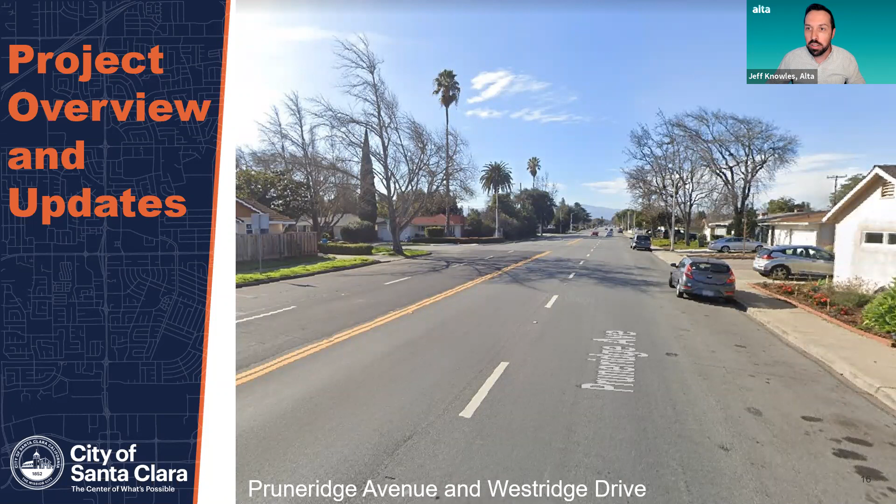I want to provide a quick project overview and updates since our last round of public engagement. Folks have asked, why study Pruneridge Avenue? What's this project all about?

Improvements for Pruneridge Avenue were included as recommendations in the city's general plan. It's also a high priority corridor in both the city and county's bicycle plans. Changes to Pruneridge Avenue help implement the city's complete streets policy, which is 18-8593, if you're interested in looking that up. The city has adopted a policy to try to improve streets in the city to accommodate as many different user groups as possible, whether you're driving, taking transit, walking, using a stroller, a wheelchair, or bicycling.

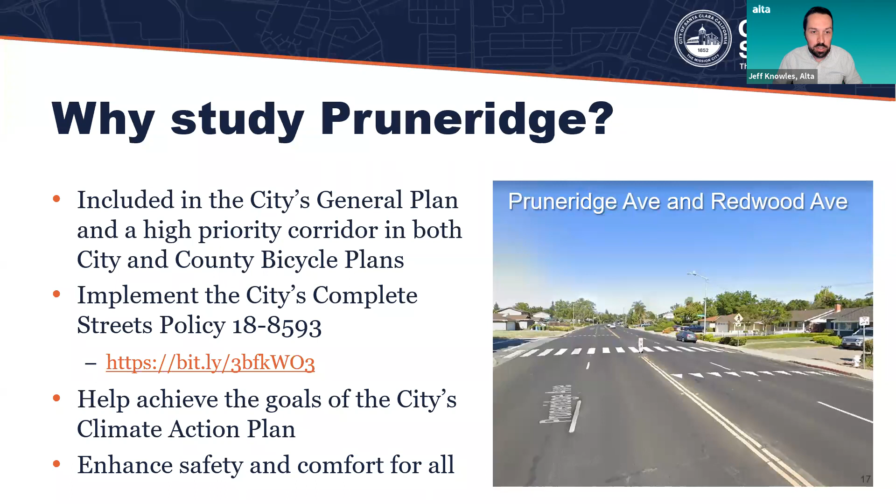It helps achieve the goals of the city's climate action plan by increasing the ability for more people to walk or bicycle for transportation and reduce greenhouse gas emissions the city produces through transportation. It's also an opportunity to enhance safety and comfort for all roadway users, whether it's residents getting in and out of driveways, people that bicycle today, or people that would like to bicycle but don't feel comfortable sharing the road with vehicles, along with residents or people in the neighborhood trying to cross Pruneridge Avenue.

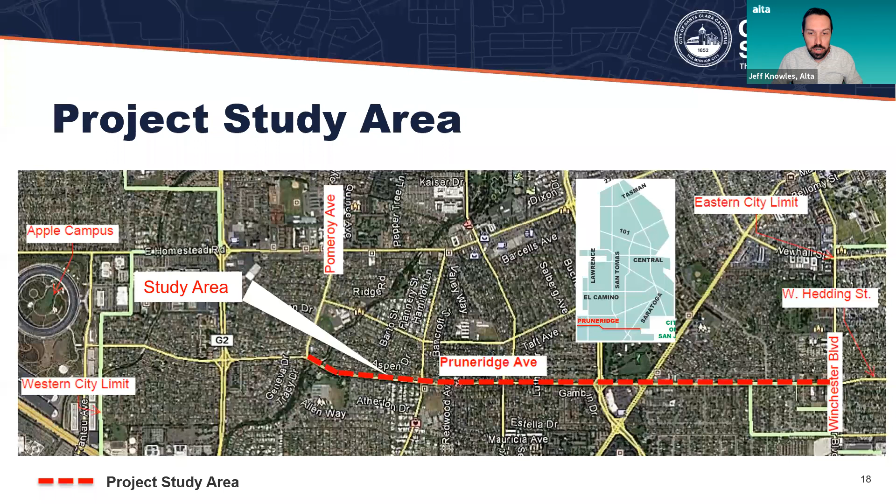This study is looking particularly at a 3-mile section of Pruneridge that goes from Winchester Boulevard, which is your city boundary with San Jose, all the way across to Pomeroy Avenue, just shy of your border with Cupertino and Apple Campus. Pruneridge, as you know, is a minor arterial with a posted speed limit of 35 miles per hour. The city obtained a grant from Caltrans to study this section to better understand the potential benefits and any trade-offs involved with creating a complete street on Pruneridge that better serves people who want to walk and bike more often.

In our last round of community workshops, we asked folks what the priorities should be on Pruneridge, ranked from most important to least important. The number one thing we heard is calming or slowing down traffic speeds on Pruneridge. It's posted 35 miles per hour, but we heard a lot of anecdotal stories about vehicles going much faster than that. People want to see a reduction in traffic congestion, improved bicycle options, walking conditions, and preservation of on-street parking. Those are the top 5.

The top 5 themes that came out of this exercise were that people wanted to see more bike lanes and bike safety. A lot of people wanted to leave the road as is. There was interest in traffic calming, overall safety and pedestrian issues, and preserving the residential character at our first workshop. Then we had a Saturday workshop just like today, back in February, where traffic calming, parking, and bike lane safety came up as the top 3 themes.

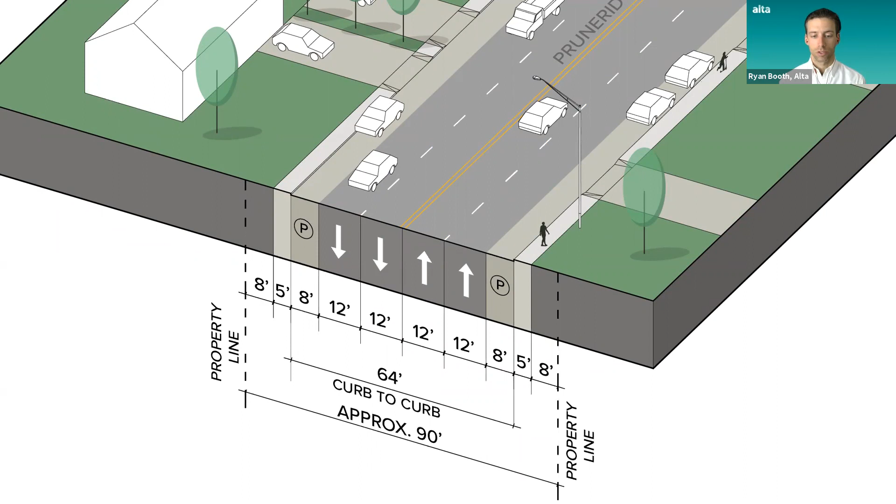Right now, all the intersections and corners have sweeping, long crossing distances for sidewalk users. The size of the corners is directly linked to the speed at which vehicles feel comfortable handling those turns. So in general, wider corners and sweeping turns enable faster speeds. The intersection and corner design on Pruneridge right now is based on old design standards and would not be compatible with today's standards.

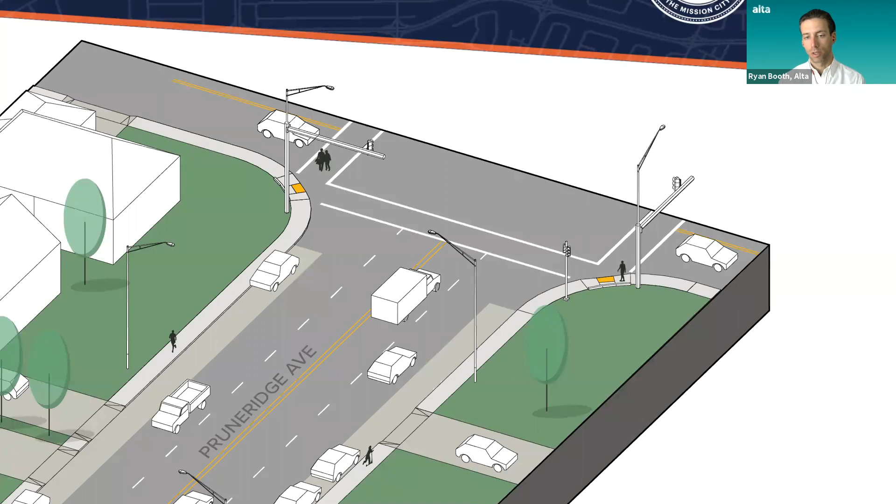Another important thing to point out, outside of the roadway, are the canopy trees that line Pruneridge Ave. They're intermittent mature trees spread along the corridor that provide shade where present. However, most trees are on private property, set pretty far back from the roadway, and don't provide much shade or enclosure that results in pedestrian comfort and enhanced residential character.

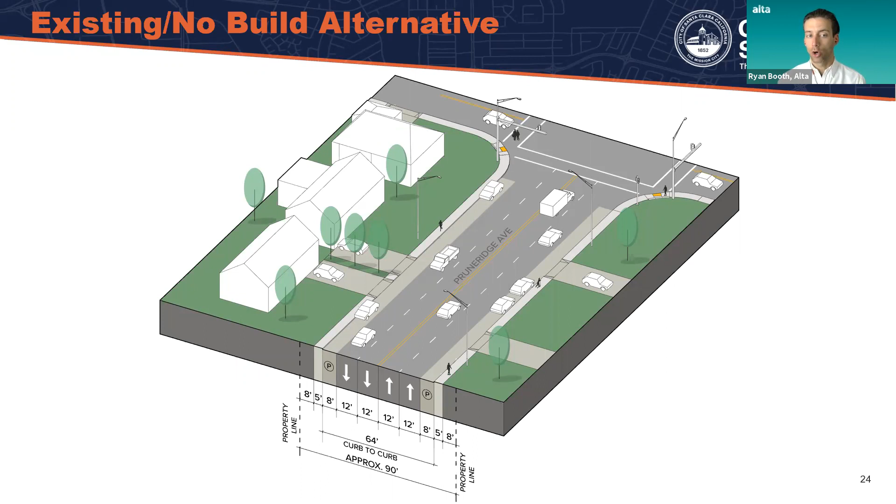So again, this is an example of what Pruneridge is today, the existing conditions. It also represents the no-build option we're presenting here today. Next slide, please.

Diving into some proposed changes: one is to maintain 4 travel lanes. Like Jeff said, to accomplish the goals set out by the city's Bicycle Master Plan, we're putting in what's called a buffered bike lane — a bike lane with an extra bit of buffer to separate cyclists from traffic, as you can see here. Just to reiterate, this illustration isn't of any one specific intersection, but represents what's possible along Pruneridge.

As I said, 4 lanes of travel, narrower lanes to fit the 4 vehicular lanes, but also to promote traffic calming or reduce how fast people feel they can go along the corridor. Moving towards the intersection, you'll see curb extensions and high visibility crosswalks.

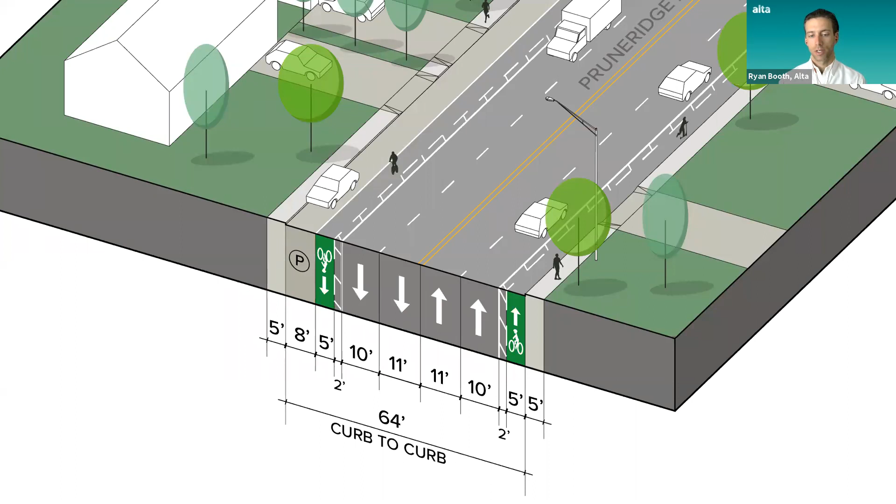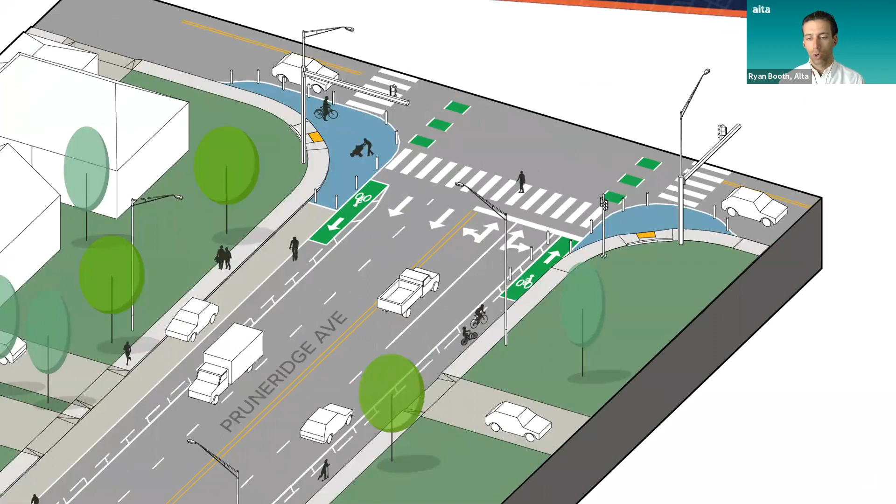What we've shown here is what we call a quick build option — paint, symbols, markings, and some vertical bollards. These are quick build, low cost compared to heavier interventions like concrete and moving curbs. One advantage of the quick build is you can have big impacts on improving safety along the corridor in a relatively quick fashion. It also allows the community to test out design options, see what works and what doesn't, and in the future, if there's a desire to make these permanent, the city can pursue funding and make permanent changes. But these painted options are great ways to introduce the community to these improvements.

And what you see here are high visibility crosswalks, curb bulb outs in blue there, representing areas to shorten the actual length pedestrians need to cross the street, and also promote those lower turn speeds and reduce the kind of cross-cut turns that vehicles are able to make today.

What you'll also notice is as the cyclist approaches the intersection with that green-backed bike symbol there, they get a little protection from a right turning vehicle, and it increases the visibility of the cyclist. So a benefit for everyone that's on the roadway there.

And lastly, I'll point out the light green trees. What we're showing here is the possibility that trees can be added along the corridor to fill in some of the gaps. These trees that we're showing here today are within the public right of way, but because of the constrained curb to curb width that we're dealing with, would be on the outside of the sidewalk. Again, outside of the sidewalk, there's a little bit of public right of way. That's where we're proposing these trees to be added.

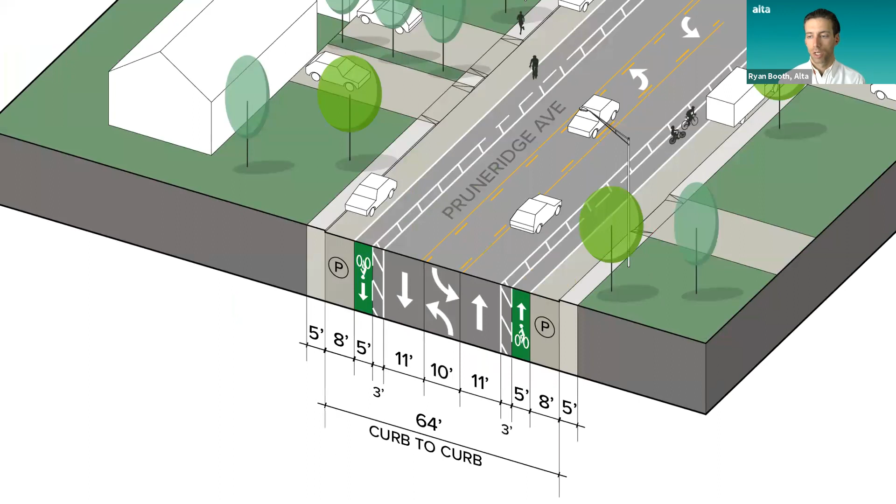All right, so for concept 2, a lot of the same things from the first concept. What you'll see, I'll point out some of the differences here. What we're showing here are 2 vehicle lanes, one in each direction, with a center turning lane. Again, enhancing the traffic calming with some narrower lanes, placing a buffered bike lane on either side.

And then by going with the 2 vehicle lanes with a turning lane, we're able to keep and maintain that parking on either side of the street, just as it is today.

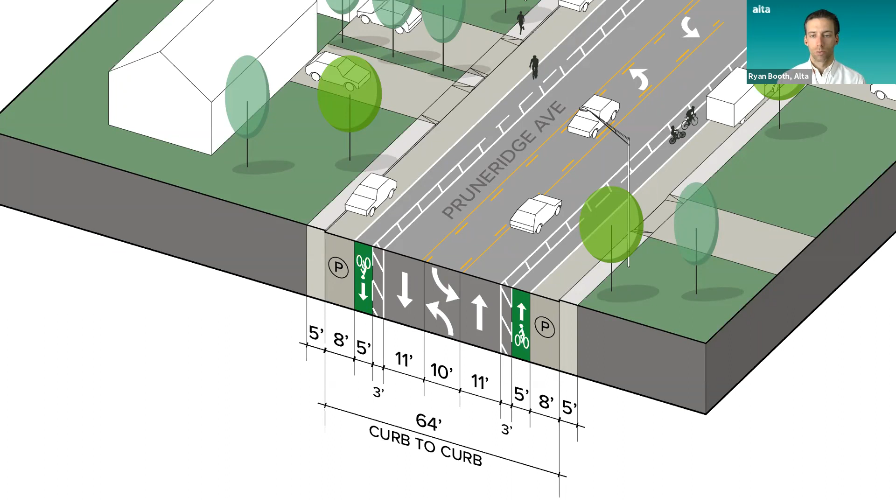Same thing at the intersections with the curb extensions and the bollards, a little bit different configuration because there's a little bit more room, but again, enhanced pedestrian safety with shorter crossing distances and higher visibility. Another thing you'll notice here is that that center turn lane becomes a dedicated turn lane at the intersections. The idea there is to keep the ease of traffic moving at the intersections with the dedicated turn lane.

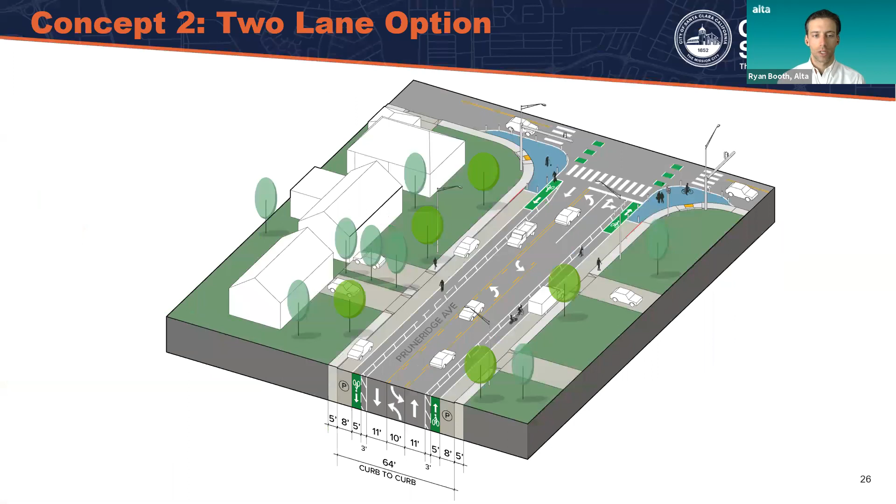All right, one more concept to go through here. Again, I'm going through this kind of fast. We're going to recap all of this and you'll have some opportunity to give some feedback in a moment.

All right, so concept 3, parking protection option. Again, very similar to the previous option with a center turn lane and 2 vehicle lanes, one in either direction. This option introduces the buffered bike lane on the curbside with the parking in the middle.

And so that configuration, what that does is that it separates the cyclist even more from traffic and allows that parking space to act as a protected buffer between moving vehicles and cyclists, and also provides a separation and added comfort for pedestrians along the sidewalk. What you have today, as you see here, is about a 5-foot sidewalk, and adding separation really enhances and makes it more comfortable and convenient for the pedestrian.

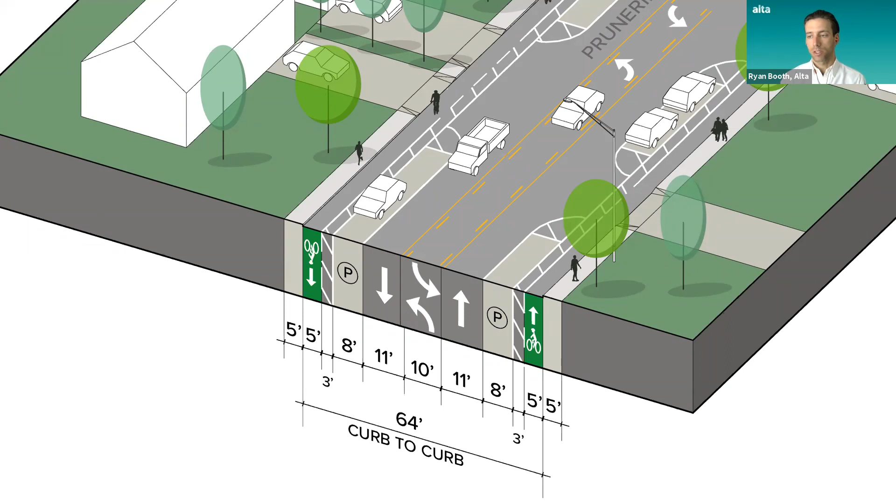One consideration that we'll have to think about here is sight distances as people pull out of the driveways. It's a big concern we've heard from the past public meetings. And so we've introduced some buffer space to pull any parked vehicles away from the driveways to allow people entering and exiting more view shed. So as you're pulling out, you get a longer view down the corridor. You can see cyclists, you can see oncoming traffic, and allows you to gauge those distances a little bit better.

At the corners, again, very similar to the previous one, the configuration with the bike lane and the corners is a little bit different. You've got the bike lane going through, again, protected from those right turning vehicles, added visibility, but yields to pedestrians crossing in those areas.

One consideration for any of these options with the bike lane will be how to coordinate other kind of public services like trash pickup and delivery. These things are, and things like maybe future transit lines, things like that. All of these are compatible with those uses and have been figured out and implemented in many situations. So many times it's about coordinating those design pieces into the design.

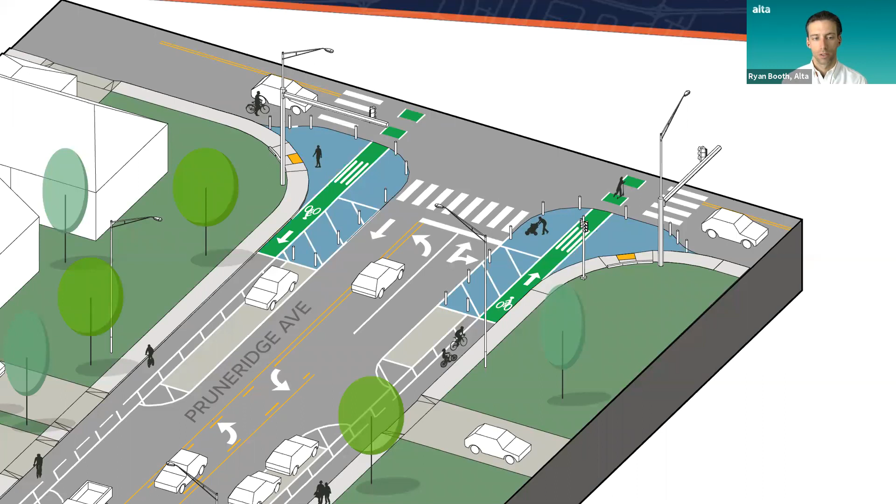All of these design options are currently on the project website with accompanying text and a survey that allows you to let us know your feedback. Let us know what works for you, what doesn't work for you, and we're going to jump into some polling right now. So get ready with your poll EV.

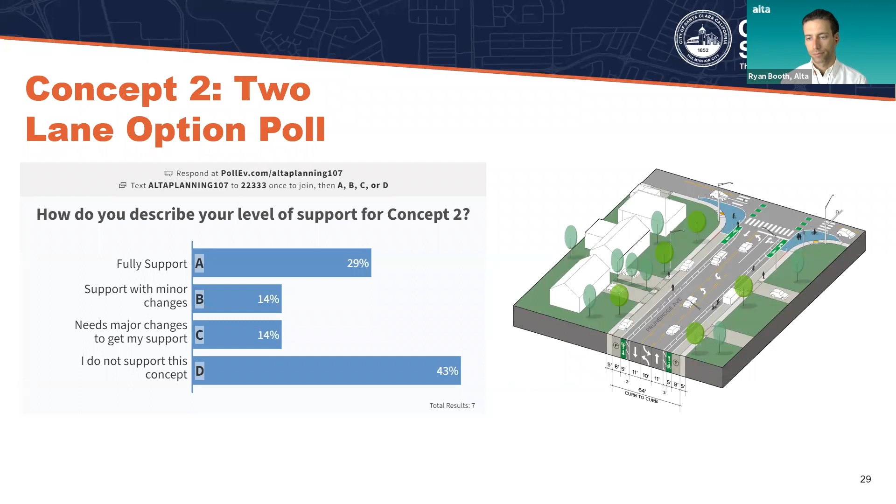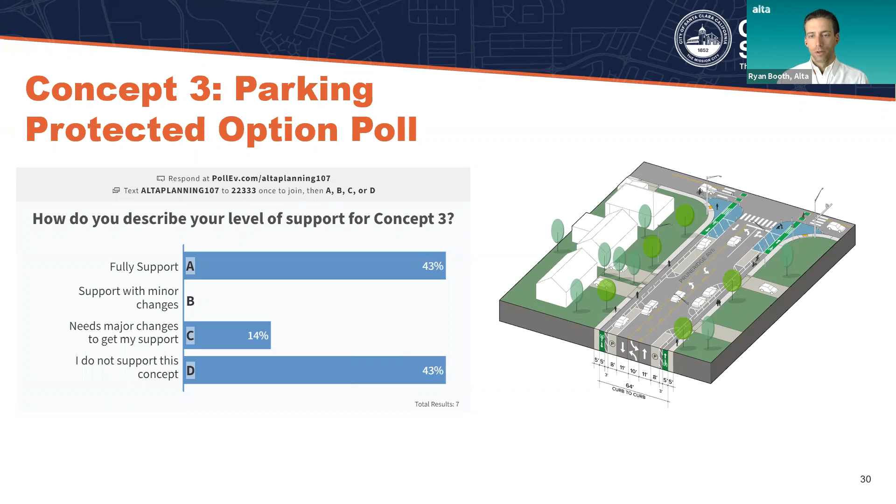Okay, looks like we've got there. So there's another option on the Poll EV, just kind of open-ended: what additional information do you need to provide your opinion today? Is there something that you'd like to explain more? Is there something you'd like to share with us?

We are going to have a Q&A to answer some live questions, and we're going to open up the Q&A so you can type questions in that we'll answer as well. Just while you're thinking, I'll remind everyone we're going to follow up these concepts with some pedestrian specific improvements that we've noticed could be used along the corridor. Again, we haven't looked at any specific location, but we have looked at the corridor as a whole and have highlighted some pieces that can be implemented to improve pedestrian safety specifically.

In addition to the bicycle, traffic, parking, and intersection treatments that Ryan described, we also looked at potential tools for improving the experience of people walking at intersections. I'm going to go through 9 different pedestrian crossing improvements. These come from the city's pedestrian master plan, and it's just kind of reintroducing these concepts and then talking about what combination works well for signalized intersections and then unsignalized intersections.

At our disposal, the city could install pedestrian crossing signs, alerting motorists to the presence of marked crosswalks, and high visibility crosswalk markings. These are sometimes called zebra stripes or piano keys, additional contrast in the color of the pavement to let people driving know that this marking, this area, is for pedestrians that might be entering the roadway. It helps increase yielding behavior and deters motorists from encroaching on that pedestrian space.

Additionally, advanced yield and stop lines could be installed. These inform motorists of the correct position to wait for pedestrians at marked crossings. They're used in advance of stop signs or signal crossings and also help promote visibility, especially on multi-lane arterial streets like Pruneridge. It's important to make sure that all vehicles can clearly see pedestrians in the crosswalk and that vehicles aren't blocking the visibility of each other.

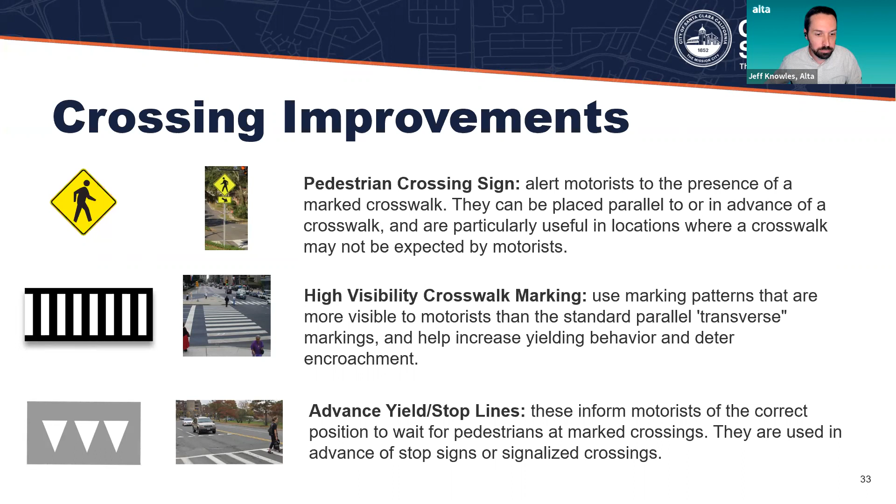Curb ramps provide a transition between the sidewalk and the roadway crossings, providing universal access for all users, including pedestrians using wheeled mobility devices like wheelchairs, small children, adults pushing strollers, and people with luggage.

A curb extension extends the sidewalk and curb at the corners of intersections. Typically, these are the width of the parking lane, 7 to 8 feet. That's how you shorten the crossing distance for pedestrians, as Ryan was mentioning in those designs.

They shorten the roadway crossing, make pedestrians more visible to motorists, and safer to cross. At some locations, we could look at improving the right turn slip lanes, most clearly at San Tomas Expressway in Saratoga. This would involve shortening the turning radius of the corners and requiring vehicles to turn more slowly instead of treating it like a highway off-ramp. Doing this helps improve the safety of pedestrians who need to cross that right turn slip lane, most of which do not have a signal or are just yield controlled. It's all about creating more visibility between the motorists and the pedestrians waiting to enter the crosswalk.

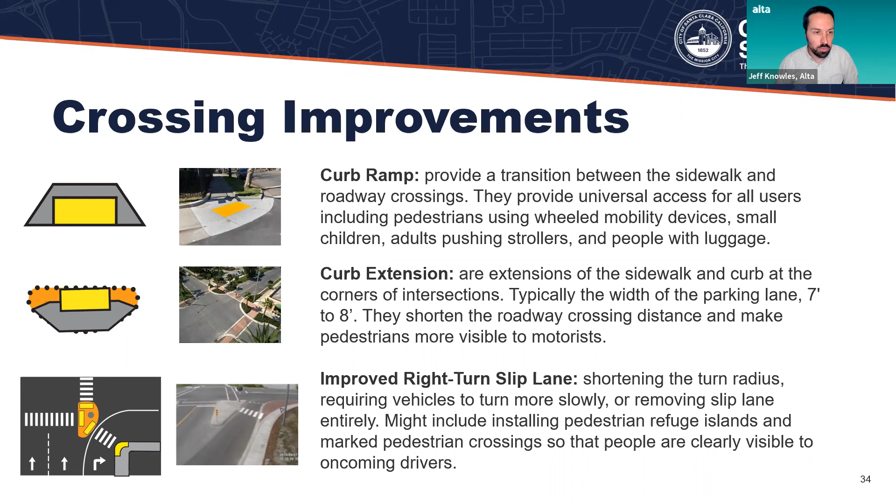There's also some things we can do with signals and beacons. We can install countdown timers and accessible pedestrian signals, also known as APS. Countdown timers indicate pedestrian walk phase and the remaining time that pedestrians have to cross at those signalized intersections. The APS devices communicate information about walk or don't walk using non-visual formats, usually a pre-recorded voice letting people know it's safe to cross, countdown information, or sometimes chirping so that visually impaired pedestrians know how to get across the street.

Leading pedestrian interval typically gives pedestrians a 3 to 7 second head start. So in this image, the signal is red for vehicles, and the walk sign is on for pedestrians, so they can establish themselves in the crosswalk, increasing visibility and motorist yielding to them.

Lastly, the rectangular rapid flashing beacon is user activated. It's a pedestrian beacon only activated when a pedestrian is present at the crosswalk. They use high intensity LED lights that alert motorists to the presence of pedestrians in the crosswalk and also increase yielding behaviors. These are really good at uncontrolled locations where there's not a stop sign or a signal, but pedestrians need to get across.

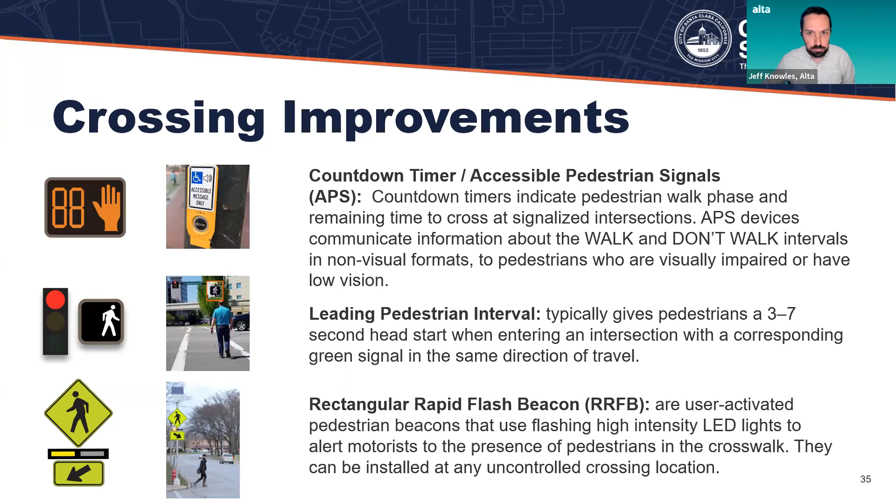As mentioned, there could be a combination of all of these pulled together. At signalized intersections, it could include changing the slip lane design where present, installing countdown timers with APS, leading pedestrian intervals, new curb ramps, signage, and crosswalk markings. At unsignalized locations, curb extensions or rapid flashing beacons, ramps, signage, and pavement markings could also be installed.

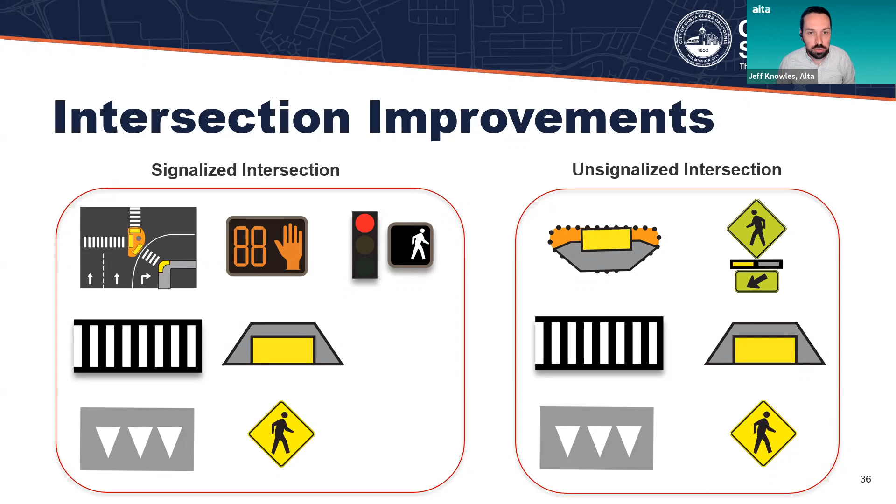So we want to know from you, what additional information do you need to provide opinions about pedestrian improvements at crossings? If you have other ideas or other technology you've seen work well in Santa Clara, neighboring areas, or anywhere you've been, let us know and we can incorporate that into our revised designs. We'll leave this open for a few folks to provide that information to us.

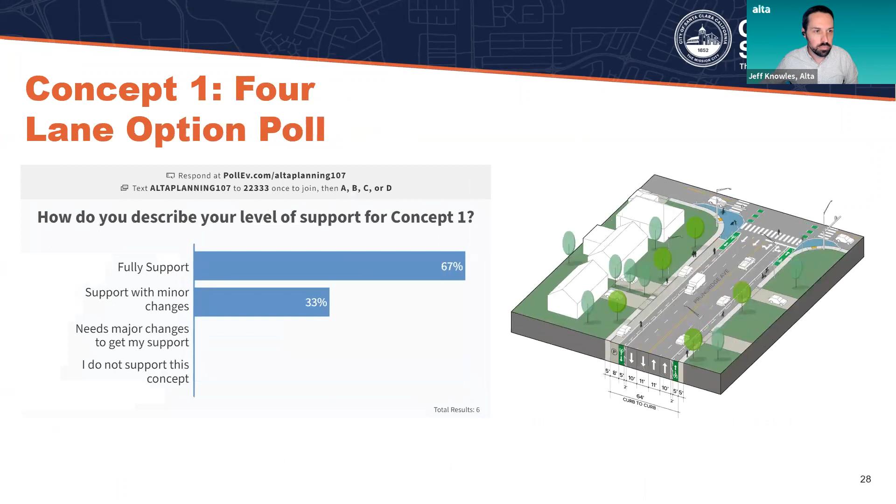So the question was really about driveway interactions with bicyclists. Ryan talked about this a little bit, but I wanted to show you more and zoom in here. It is something to be concerned about: drivers in residential driveways backing out and crossing the bicycle lane as they're looking for cars. It is something that we look at.

There are some benefits, however, of having the bicycle lanes on each side of the street. Bicyclists are only moving in one direction, so the driver only needs to look for one. Drivers today are already crossing the sidewalk as they back out of their driveways, and so they know to look for pedestrians in both directions, so it's adding an additional roadway user to look out for.

We've enhanced this by also looking at peeling back the parking, as Ryan mentioned. Half a car length, maybe a full car length, of prohibited parking at those driveways allows for increased visibility.

The other thing to make note of is that residential drivers will learn the right behaviors about looking for bicyclists, whereas if it was a commercial driveway, like a gas station, you might have a lot of new drivers to the area that are not accustomed to crossing this new type of bike facility, so they don't know to look more closely for bicyclists. The benefit of having mostly residential driveways is that those drivers are going to learn pretty quickly how to navigate this in a safe fashion.

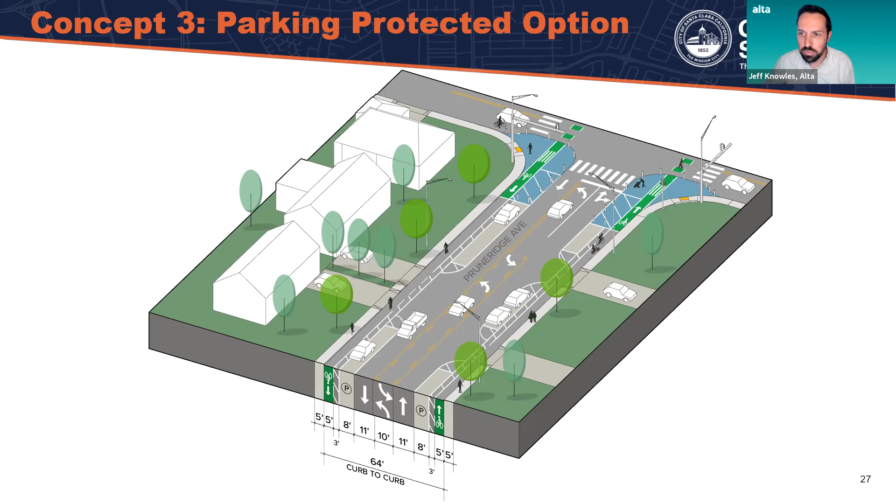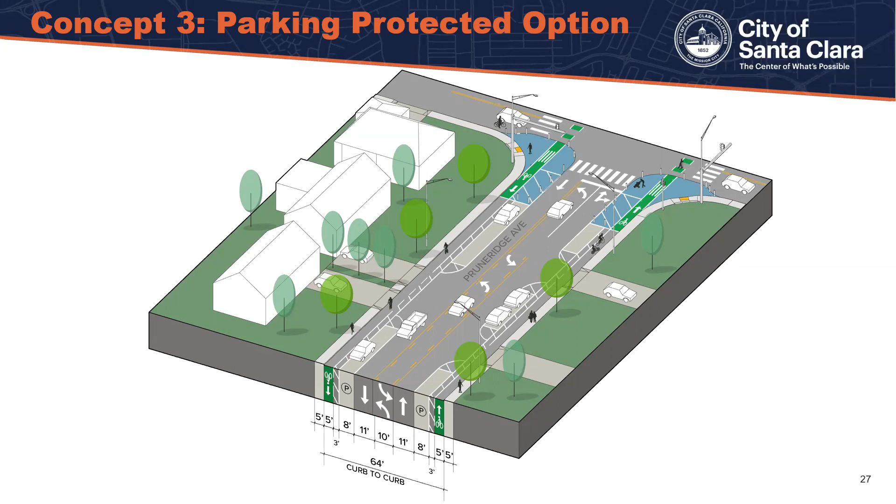Thank you so much for having this meeting, these are all some wonderful options. One thing I was wondering: Pruneridge has a lot of crosswalks right now, like outside the swimming pool and outside Redwood Avenue. Currently people taking those crosswalks have to cross multiple lanes of traffic, both eastbound and westbound. If we choose option 2 or 3 and create a turning lane in the middle, would it be possible to put a pedestrian island in that turning lane so pedestrians only have to cross one direction of traffic at a time?

Carol, you want to start off? Sure. We'll definitely take a look at where the locations are that we can best do pedestrian improvements. We'd have to do a traffic study to see what's the best type of improvement, like Jeff showed today in this presentation. It's good to point out that with option 2 or 3, you'll have a reduction in travel lanes, so your crossing distance will be much shorter than crossing 4 lanes of traffic, now only 3. We'll take a look once we collect all the data to see what improvements are best designed at these intersections.